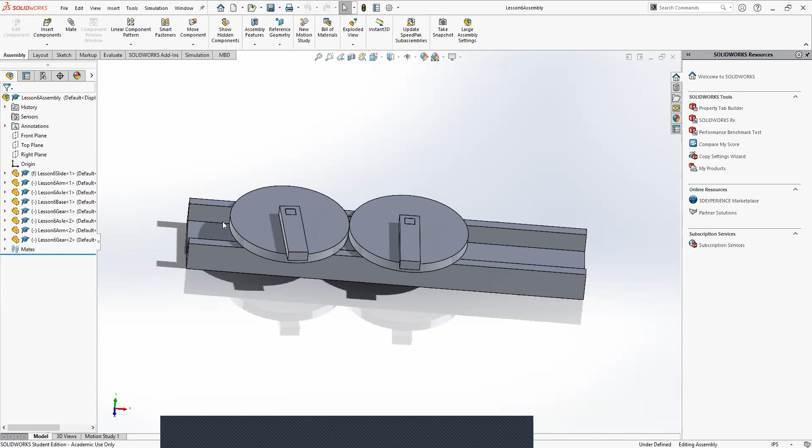So we haven't fully defined this. We did that on purpose though, because there's a couple fancier mates I kind of want to show you guys how to use.

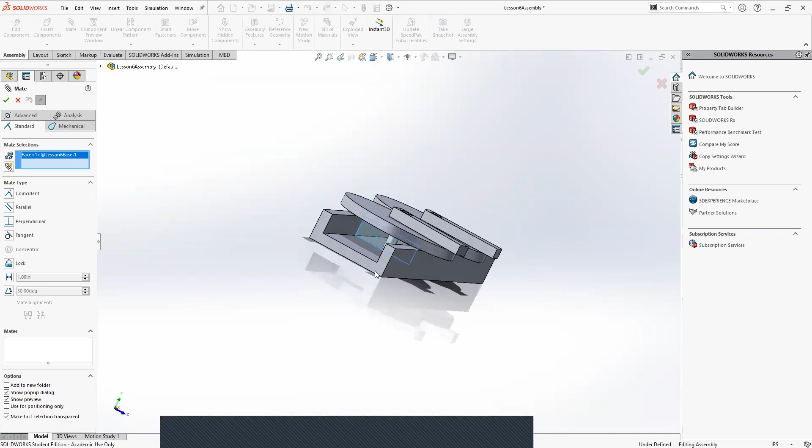So we're gonna go up to the little mate icon. For the first one, let's do this: select the base of one of the gears. No, don't click the actual gear, click the rectangular base we had mounted it on. Then click the side face like I have, and the side face of our slide, and make those coincident for now. This is just going to be temporary to keep them from sliding side to side.

Let me know once you guys have done that, and then we can go to the next part. Okay, that's done. Cool. Now we're going to go back into mate. As you can see, there's 4 tabs, right? We've been in the standard tab this whole time. That's the one you use most of the time.

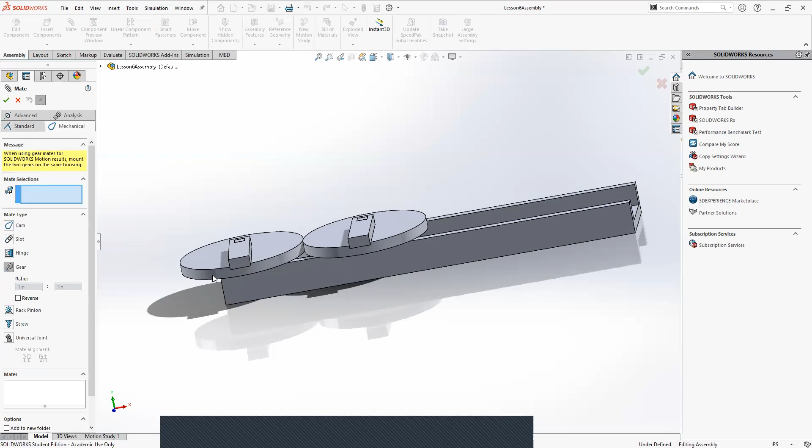We're going to click over to the mechanical tab now though. Once you're there, we're going to click on the gear icon. And then we'll click the circular faces, like the edges of our quote unquote gears. So once you click on those edges, you can click OK to make them mate.

And what that's basically done, that gear mate, it's made them work basically like gears. So as you can see, when you use the handle to twist one of them, the other one will also spin. This is a way you can basically use gears in assemblies.

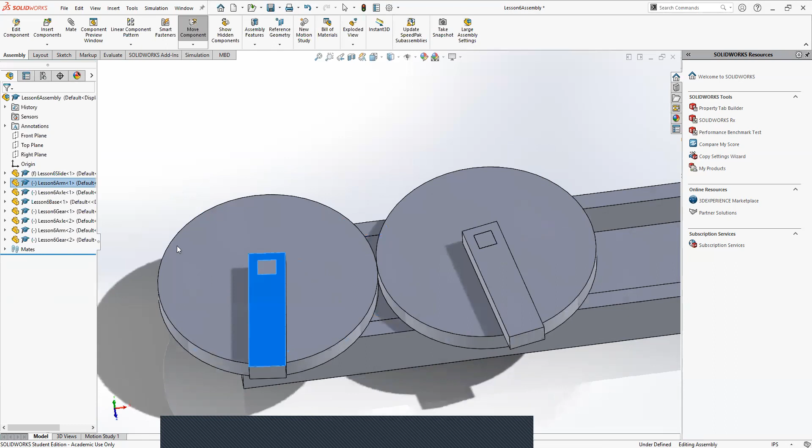And you can do this with actual gears as well. Like if you're either designing your own gear or downloading a gear, you can use the gear mate on actual gears as well. We're just using circles instead because it's easier to actually make that part. But yeah, when you guys are designing, if you ever need to design a little gearbox or some sort of power transmission system, something with gears, this will be a good tool to test.

Just a good way you can kind of put everything in an assembly, see how everything is going to spin.

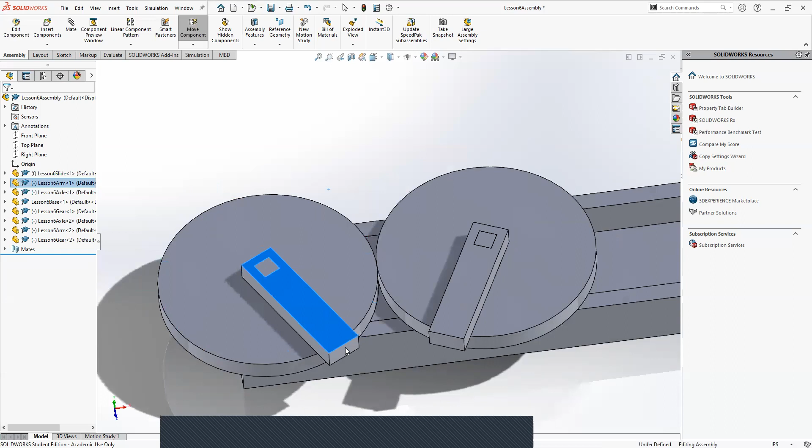And what's cool is it does work with gear ratios. So right now, since our quote unquote gears are the same size, you can see they rotate together at the same speed. However, if this gear was twice as big as this gear here, then the gear I'm driving would spin twice as fast. It does work with gear ratios, which is really useful. So you can get an idea of how fast stuff will spin.

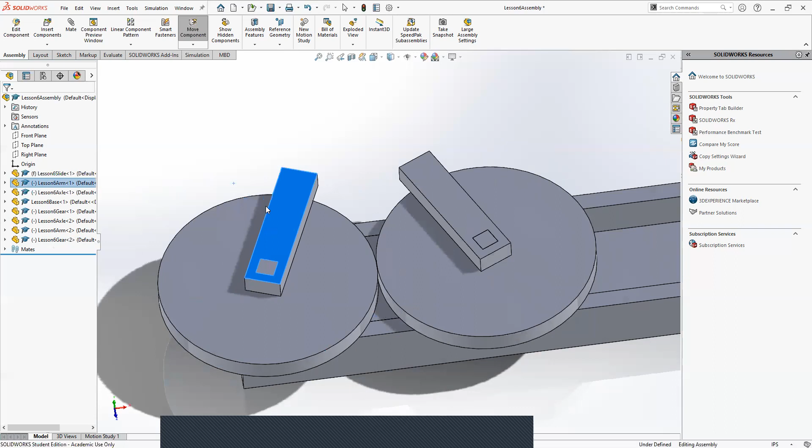So yeah, does that make sense? Were you guys able to get the gear mate to work? Must not have made it fully defined originally, since the arms aren't fully defined, because when I try to spin them, they're going through the design. Do you know what I mean, like up and down or side to side?

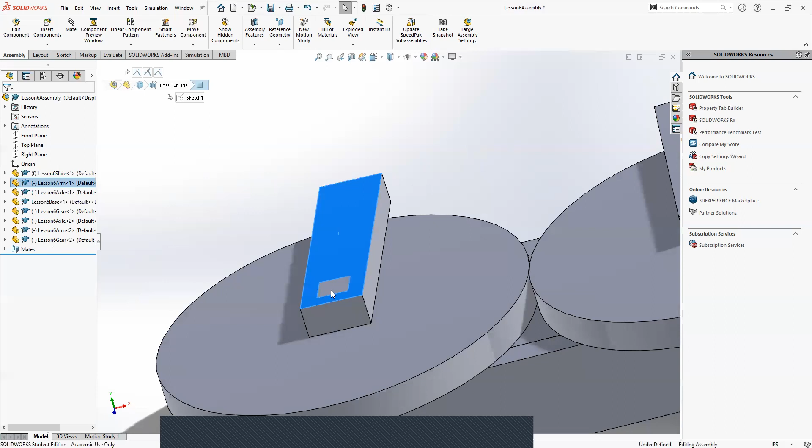Up and down. In that case, I would mate the top face to the top of our little peg here. That should stop them from going up and down. I would make them coincident, just to kind of lock them in place.

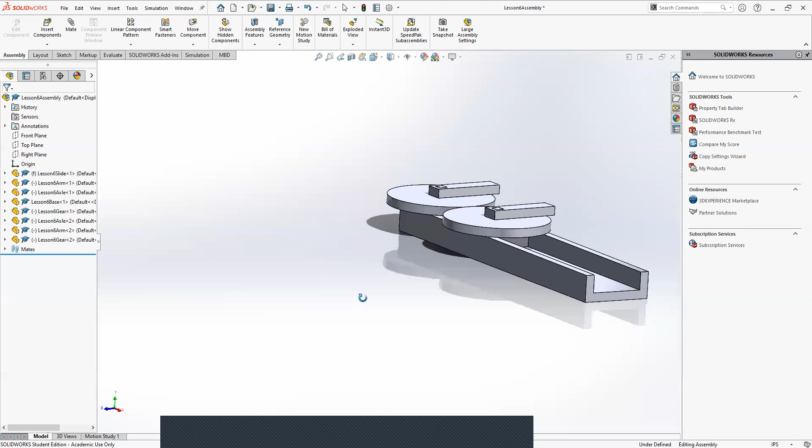It worked. It worked? Hmm. Cool. All right, so if you guys were both able to get the gear mate, this one's a cool one.

There are a couple other mechanical mates as well that I won't go over. To be honest, it's because I've never used them before. This is the only one I've ever actually had to use. But if you ever wanted to learn how to use one of them, you could always just look it up. There's really good documentation, I just have never needed to use it yet.

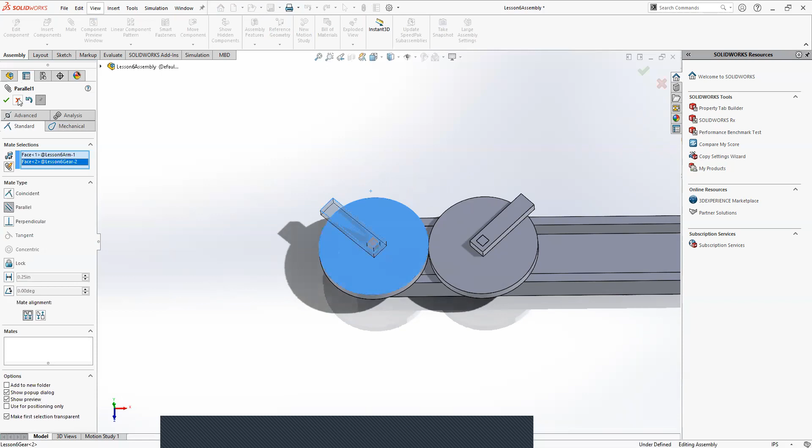If you guys are interested in learning it though, maybe next class I can do a bit of research beforehand and try to do something on it. But for now, we're going to try one other mate.

So in the last class, remember how we used an angle mate? If we go into the advanced tab under mate, we'll see there's a bunch of stuff. The two I find most useful are the bottom two. If you compare them to the standard options, they look very similar to our distance and angle mates. And that's because that's kind of what they are.

But instead of just mating it at a specific distance or angle, we're going to work with the limit angle mate. I'll show you how it works. I'm going to click the side of one of the gear's arms, then click the side of the slider, then click this limit angle mate. What it does is give me a maximum and a minimum angle. So instead of locking it to one angle, I can lock it between two different angles. Maybe I want it to rotate between, say, 90 degrees and 180 degrees.

Oh, hold on, that didn't go through right. 90 — oh, it's because this one needs to be the smaller one. That's why.

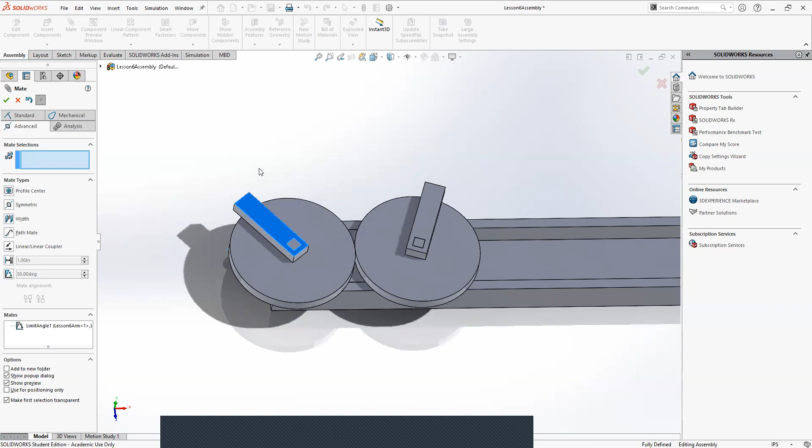Mine won't work. Mine won't rotate at all. No, I think I did it wrong. I think I know what I did wrong, but hold on — actually, give me a second. Let me try it again.

I know what happens if you go into editing the mate — sometimes if you put the same angle by accident for the maximum and minimum, it'll just keep it stuck at that angle. What happened to me was I tried putting the smaller angle in the top box and the bigger angle in the second box, and it gets angry at you. Make sure you have the smaller angle in the second box. So if you copy what I have on my screen, it should work.

Taylor, were you able to get it to work? Yeah. Okay, perfect.

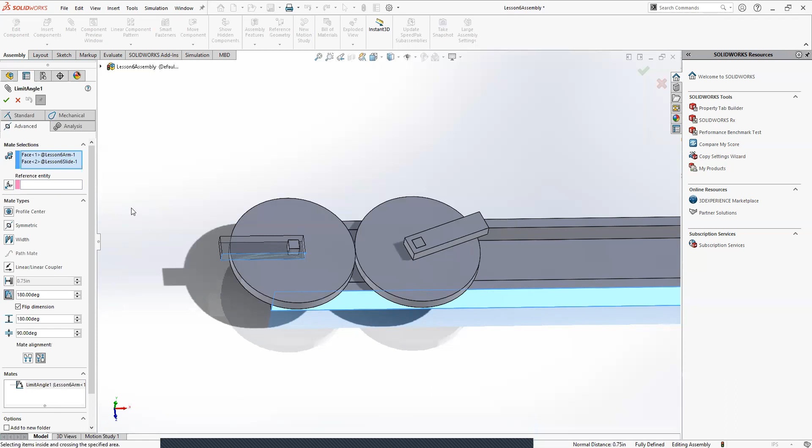Julia, were you able to figure out what's going on? I'm just trying to delete it right now because I know what I did wrong. You see the part where you click on the angle thing, like before you even do anything — yeah, and then it says 180 degrees. Yeah, I just clicked on that and realized I messed up, so I put enter, and it went to the same spot like your little leg thing did, and I thought that was fine, and then I checked it. Yeah, and then I messed it up.

Hold on, I'm going to try to delete it. This up here just tells you what angle it's at currently, and you can set that to whatever you want between your range. So I could set it to 100 degrees if I want. But these are the ones that set the bounds — this is just to display the current angle it's at, which is kind of useful.

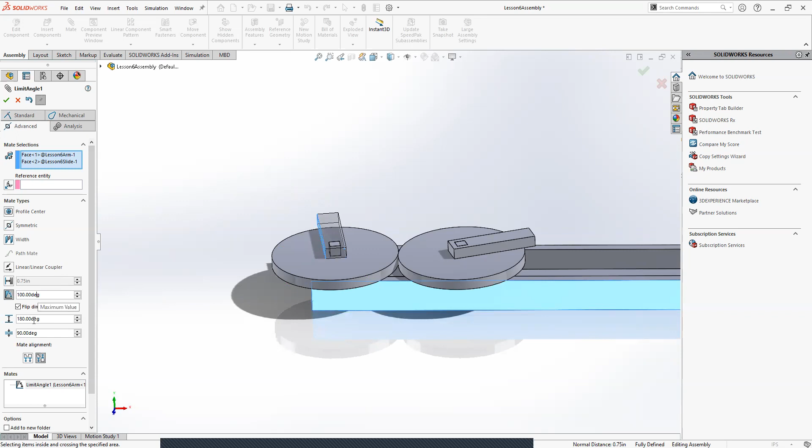All right, let me know when you finish that up, and then we'll do the next thing.

Taylor, if you're ready for the next thing, delete that coincident mate we had made between the side of our slider and the side of our base to keep it locked on one side. We're going to delete that.

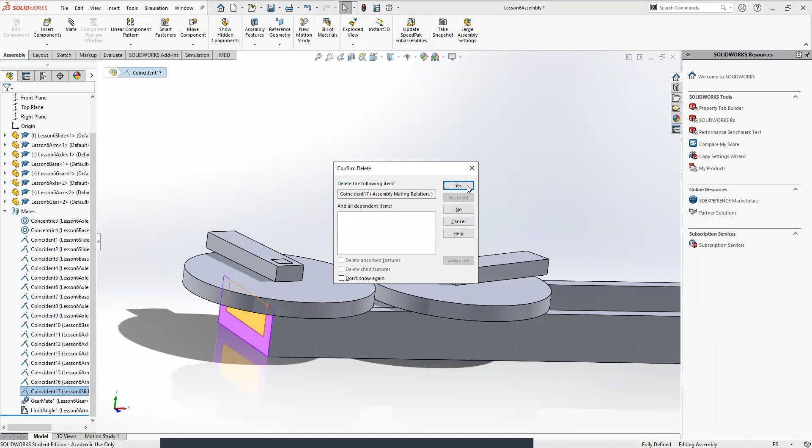Okay, wait, I got a question. I got it to move, I kind of did it. But you know how yours is sticking out on the side there? You're putting it where you are right now, like that, and that's where it starts, then it goes this way. It might have just been what faces you selected.

What you can do is try swapping your mate alignment. It could just be that you selected different faces than me, so since your angles have different reference points, they're going to look different. That makes sense, you know?

Yeah, I think you're right, now that I'm looking at it. Which is totally fine, I just wanted to show you how to use that mate, so if yours looks a little different from mine, that's okay. I'm not too worried about this working like an actual mechanism, it's more about you guys seeing how the different mates work and what you can do with them. So if it looks different, that's totally fine, I wouldn't stress about it.

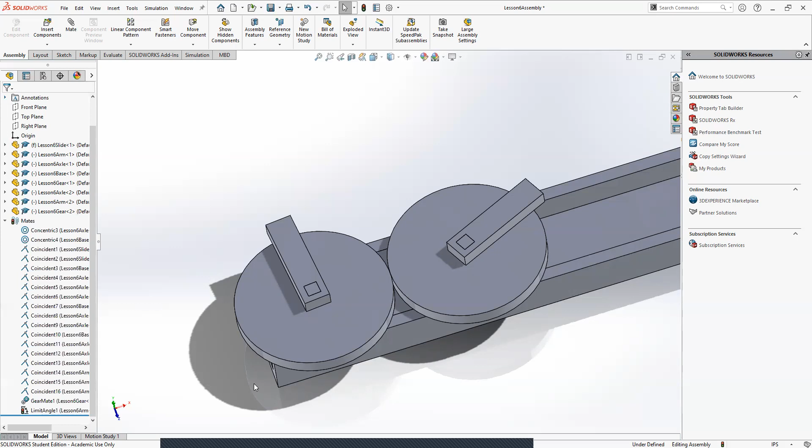You're able to get it to work though, like kind of rotate 90 degrees. Perfect, okay. So in that case, just delete that coincident mate we made near the beginning of the class, the one between the base and the side of the slider that we used to lock it on one side. Once you guys are both done with that, just let me know.

I'm done with that. Okay, cool.

And Julia, what are we doing? My bad, you remember the coincident mate we made right at the beginning to keep our base from moving around? We made it the side of our base. Yeah, okay, hold on, yeah.

Let me get rid of that, the side of the base to the side of the slider. Just click on that mate and hit delete.

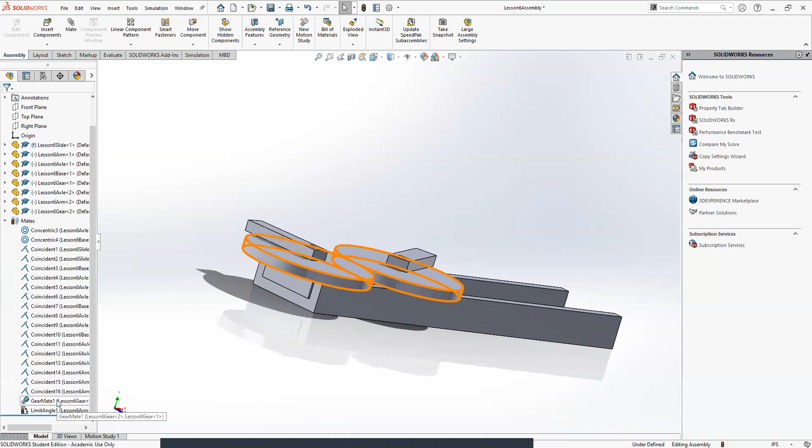You can go into the mate drop down. It should be the one right above your gear mate, because it was the one you did right before then. Okay, because I was confused on which one it was gonna be. You could always click on it to make sure, and it'll highlight the faces it's mating, so you can make sure it's the right one that way.

Okay, I deleted it. Cool. All right, because we're gonna replace it with a cooler one.

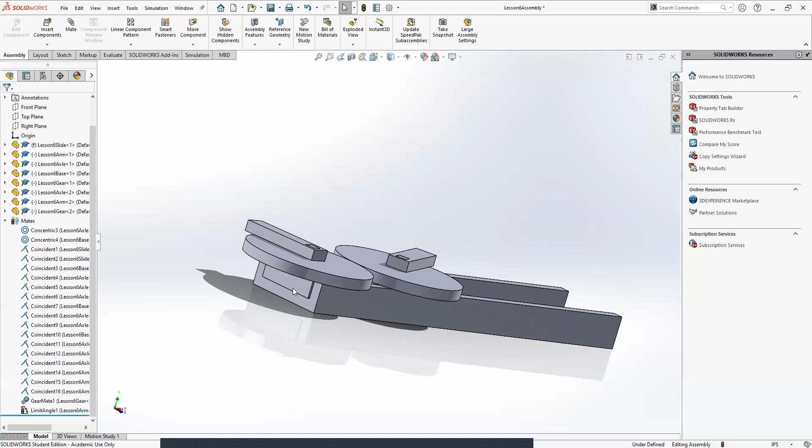So we're gonna go into mate again, go into the advanced tab again, and click on the distance one this time. It works basically the same way the angle one did. First we need to select our faces. I'm going to select the faces of the coincident mate we just deleted, so the side of the base, side of the slider. What this one does is work very similar to how the angle one did, where it'll allow it to move between a maximum and minimum value.

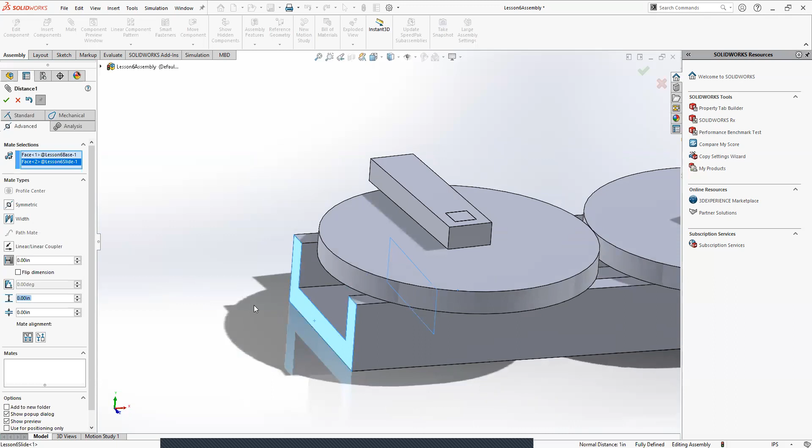What I'd like us to do is set it up so that this little base can move inside of the slider, but can't move outside of it. Because right now, if we dragged it all the way to the side, it would just move outside the slider and keep going. I want it locked inside of it, if that makes sense.

So our minimum is obviously going to be 0, because we don't want it going further to the left than that. For our maximum though, I forget how long I made this slider. Let's try 10 and see how that looks.

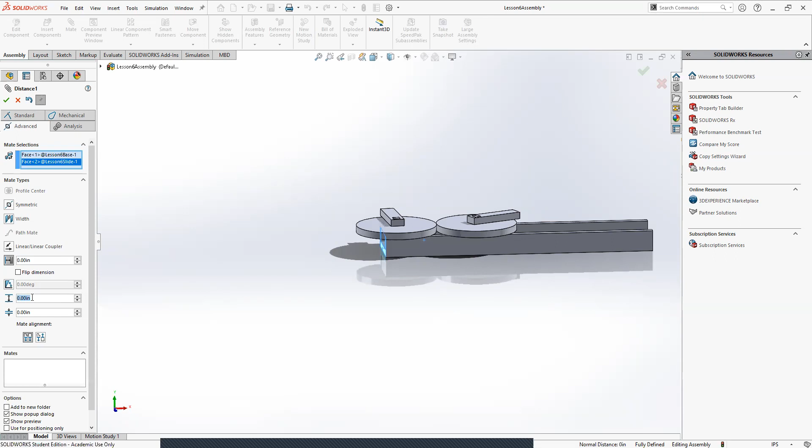My number keys aren't working. That's not working for me either. Okay, in that case, let's see.

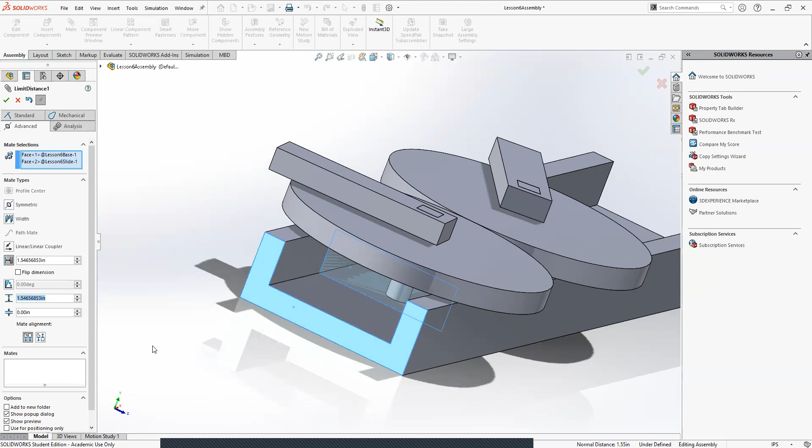I'm gonna select the two faces, go into advanced, click distance mate. We'll say the minimum is 0, and the maximum is 10. Oh, it worked for me that time.

All right, let's see what 10 looks like here. How does 10 look? 10 is too far, I'm gonna make it 7 instead. How does 7 look? Nope, too far. 6.

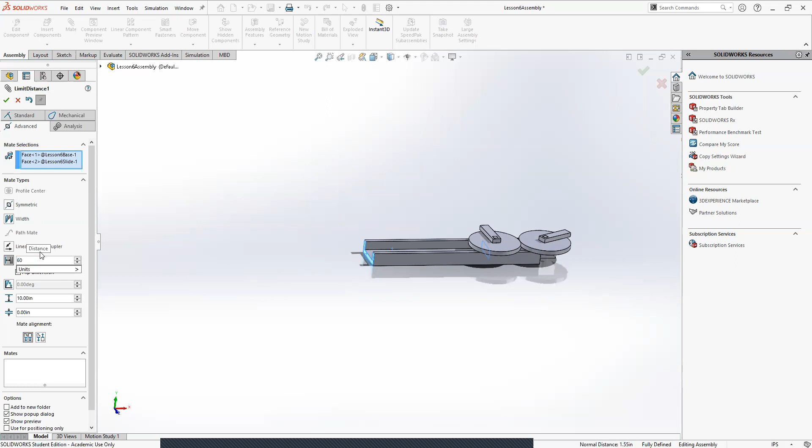6 is right. Oh, nope, 6 is not right, hold on. Oh man, did I mess up one of my mates? Oh no, I didn't, it's just transparent. Okay, so I think we want to set our maximum to 6 inches and our minimum to 0 inches.

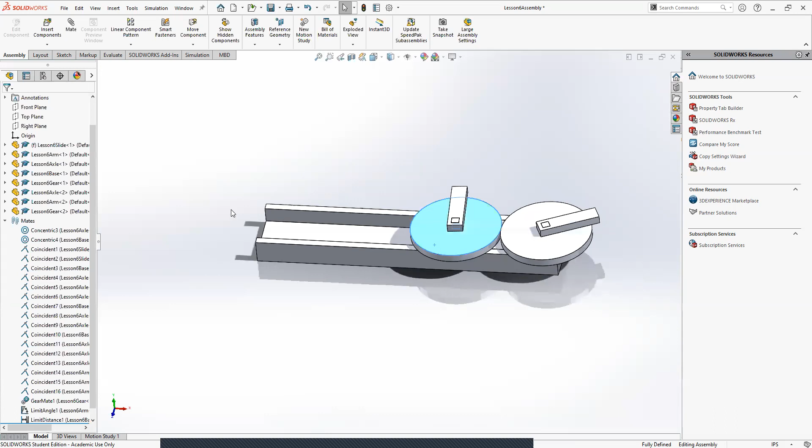Now it should be able to only move inside the slider.

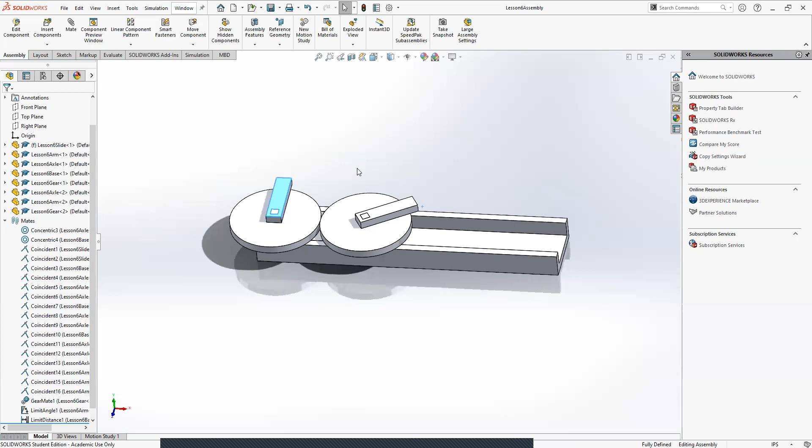I was able to get that. You were able to get that? Awesome, it worked the second time, even though it looked like I did the same thing. I don't know, I bet whatever. I guess it worked. Yeah, for some reason it wasn't letting me enter numbers into the box the first time I did it. I'm not sure why.

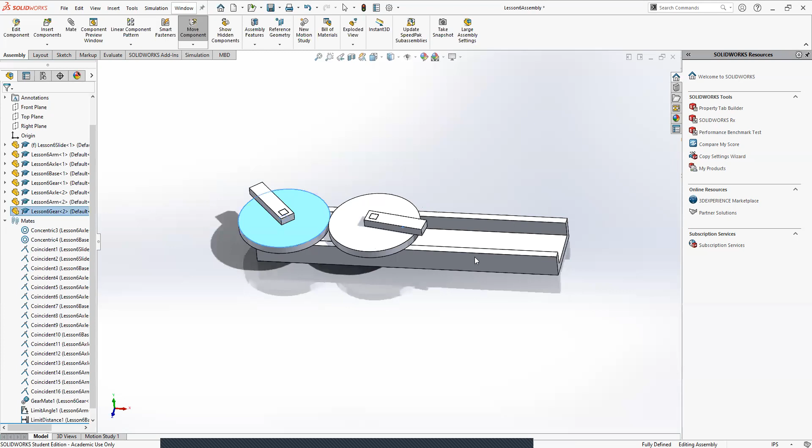Do we do it with the other side now? You don't need to, because if you properly set it up, what's happening is when it gets to the other side, this side is hitting that max distance. Oh my bad, wait, what was the max distance? The minimum distance is 0, the max distance should be 6.

Oh yeah, because I put 10, that's why. Okay, go lower. I originally put 10 as well, but that was too far. Yeah, all right, hold on. Normally what you'd want to do is take some measurements and do a little bit of math first to see how far it can travel.

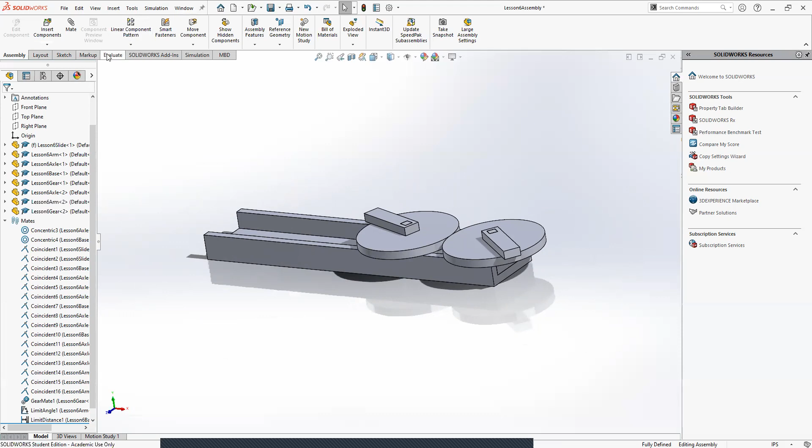I forgot the measurements though. I guess I could have used the evaluate tool. You go into evaluate, into measure, and you can measure the distance of things. So I could have gone here. Oh hold on, I clicked that side line. Come on, select the line.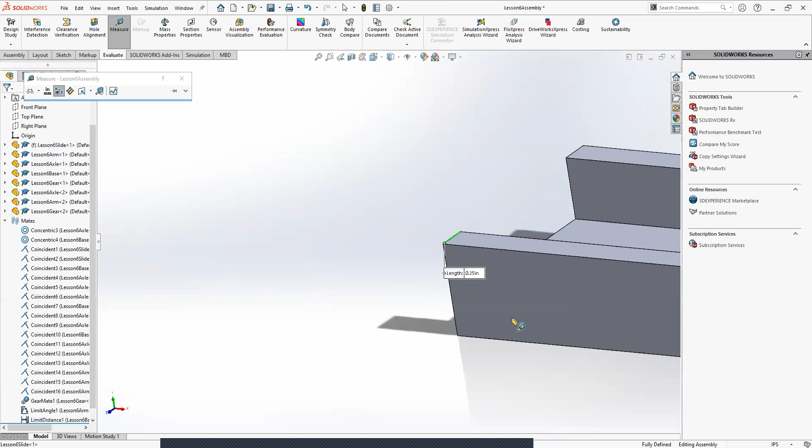Okay now I'm good. I'm just kind of curious, so let's see the length of my slider.

Let's try something. Have I shown you guys how to use the measure tool before? I don't think so. Okay.

Cool, in that case let's go over to the evaluate tab, and then we'll click on the measure tool. It looks like a little tape measure, and it lets us calculate the distance between things we select. So if we select one side of our slider, and then the other side, it'll give us the distance between the two. We can see it's 10 inches long, our slider.

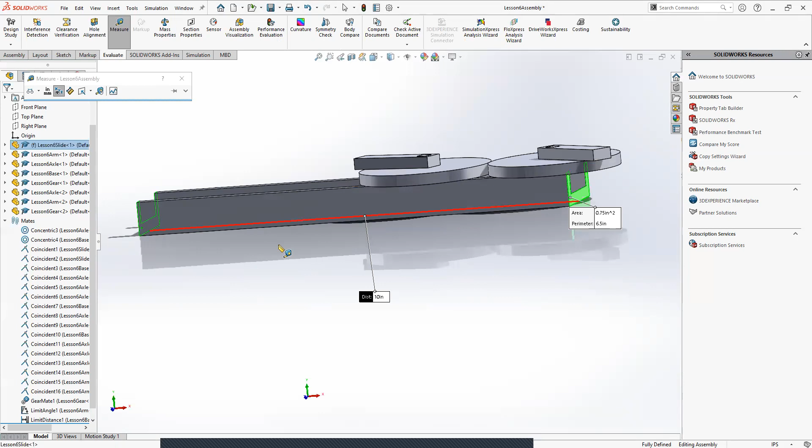By clicking on those two sides, it gives me the distance between them, which is 10 inches. And if you click off into the distance, it'll clear your selections. So now if we select the two sides of our two bases, that side and that side, we see that distance is 4. So if we do the length of the slider minus the length of our bases, which is 4, we see that the distance between the side of this base and the side of the slider here should be 6 inches at the max.

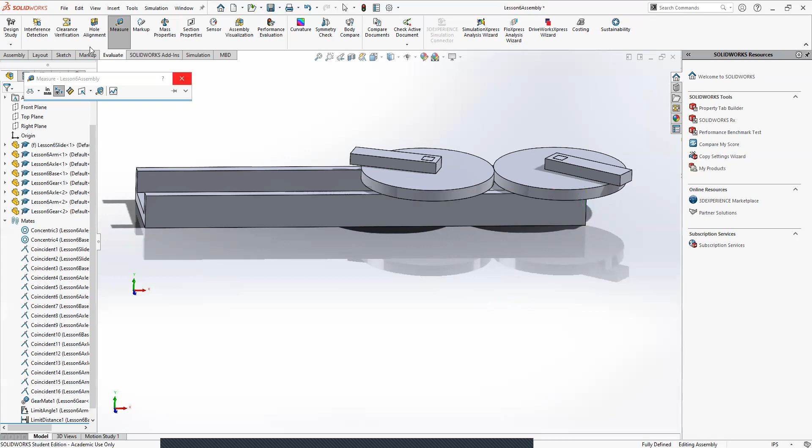So you can do a little bit of math in measuring to figure it out instead of trial and error, which probably would have been the better way of doing it. But yeah, the measure tool is super useful, I use it all the time.

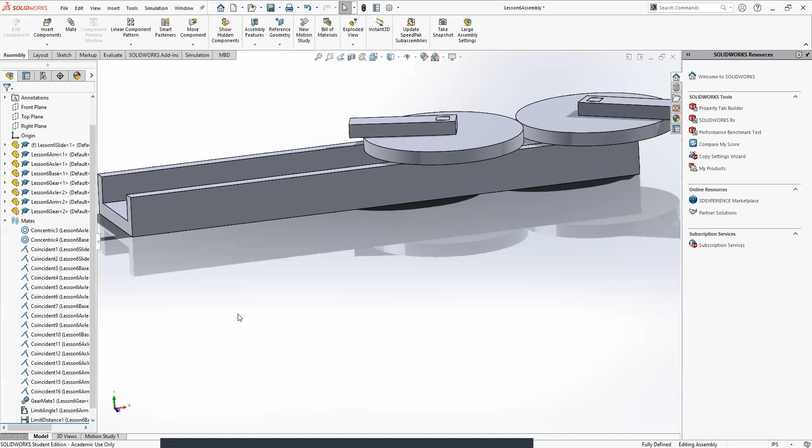That way you don't have to go back into the parts in the drawings to figure out the distance, you can just tape measure them and see how big it is. It's especially useful if someone sends you parts or something, that way you can do a quick measure without having to sort through all their sketches, because sometimes it can be tricky to go through someone else's parts depending on how they make them. So using the evaluate tool, you don't have to really mess with any sketches, it's really nice.

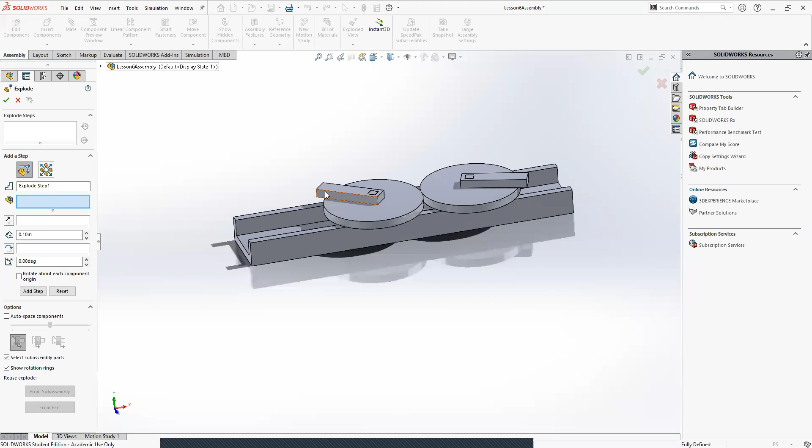So once you have the explode menu open, whenever you're doing an exploded view, you want to take it apart. Think of how you personally would take it apart. Looking at this, I'd say first I'd take the arm off because that's kind of holding on our gear, then I'd take the gears off, then I'd take the pins out of the bases, then I'd take the bases out of the slide. So think through the order you'd want to take it apart, what you think would be the best way to do it. So we're going to start with the arms.

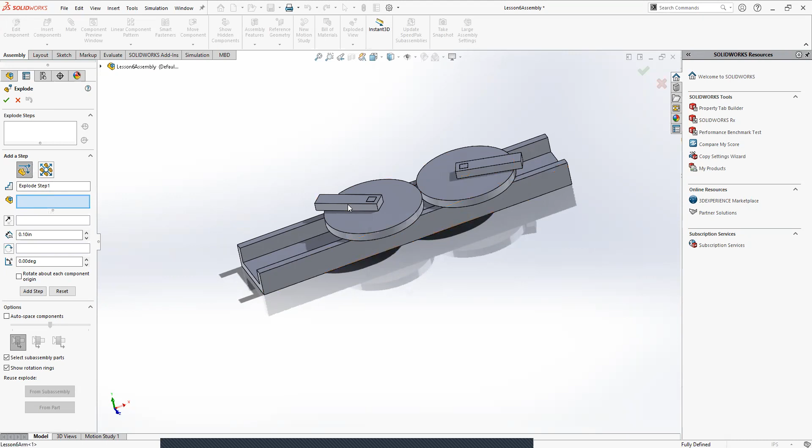It already has our explode step components selected. So we just need to click on our first arm, and I'm going to do both arms together.

Now you see it gives us these arrows that we could drag them around on. I want to bring mine directly upwards, not off to the side, because we're thinking about how we'd want to disassemble this, and obviously there's a pin there, so we're not going to drag it to the side.

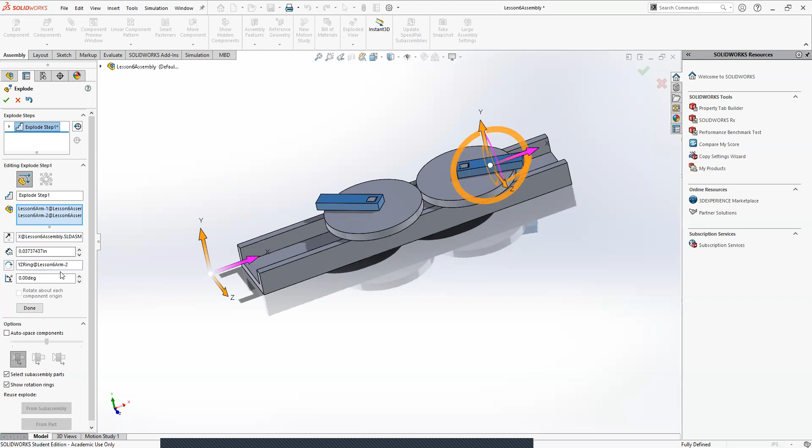So I'm going to drag it straight up. When you're doing your first ones, you want to make sure you're leaving enough room to bring the rest of your parts up. So I'm going to bring them up a decent distance, about that far.

The other thing is you could also put in the distance yourself. If you know you need this to be exactly 4 inches high, in this little distance box you could type in 4 and it'll move them up exactly 4 inches, which is nice if you want all your parts spaced in a certain way. I usually just drag it by eye because I've never had to do anything like that, but it's something you can do.

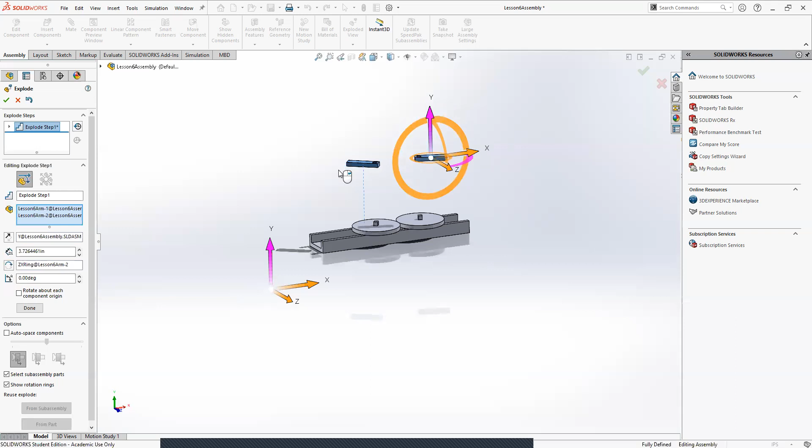Once you have the arms dragged up to where you want them, I know most of the times when we're done with something, we hit the check mark. We don't want to do that here because we haven't finished our explode view yet. If we click it, it'll just close our explode view and say, there's your exploded view, and we'll just have our arms up there, and that's not what we want.

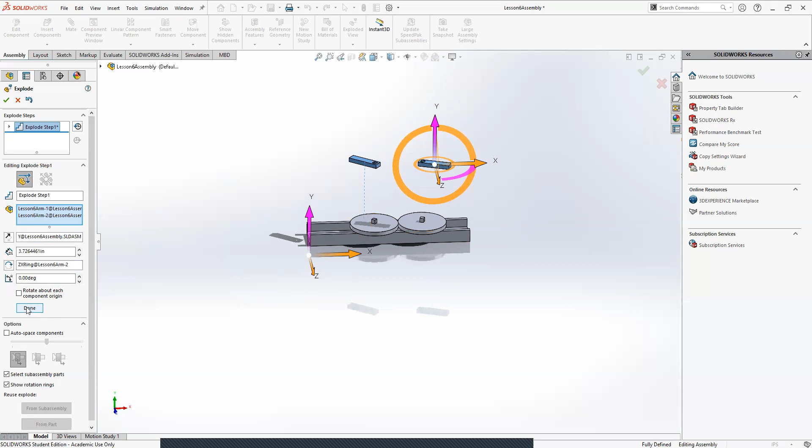So after each step, you have to click this little done button down here. I'm going to click done, and now you see it saves the step we just did. Now we get to move on to the next one.

So I'm going to start with my gears. I'm going to select both my gears, and I'm going to bring them up, making sure to leave enough room for what comes next.

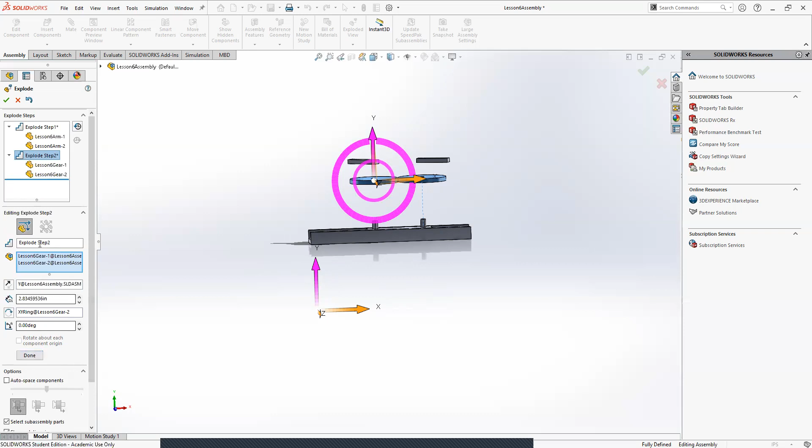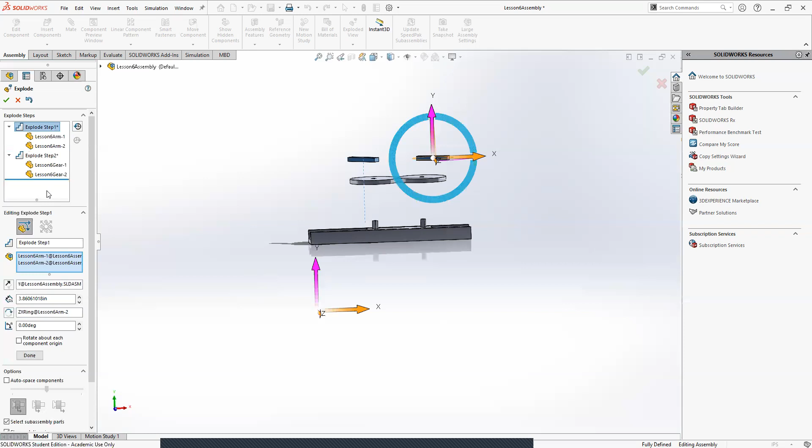And that's basically the steps you follow. Now let's say you messed up on a step somehow. You can, in the explode steps, click on it and actually edit it. So maybe you go back and realize you didn't move the arms up high enough, you can just click on that step and move them up. So you can go back and edit them.

I'm going to click done, and you see it brings me right back to explode step 3. So I'm going to kind of finish off this exploded view. Let me know if you guys have any questions. But yeah, now I'm just going to bring the pegs up.

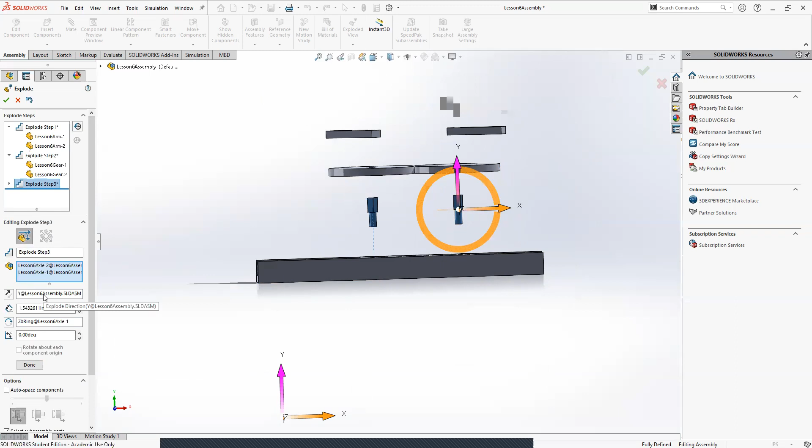When you click the check, will it do something, or will it just stay there? Once you finish it, we'll see. Good question. Oh, selected the wrong thing. There we go.

And you can see I don't really like how mine are spaced, so I'm actually just going to go back into my other steps and edit them, because I feel like mine's a little too cramped right now. They make it really easy to edit this stuff though, which is super nice.

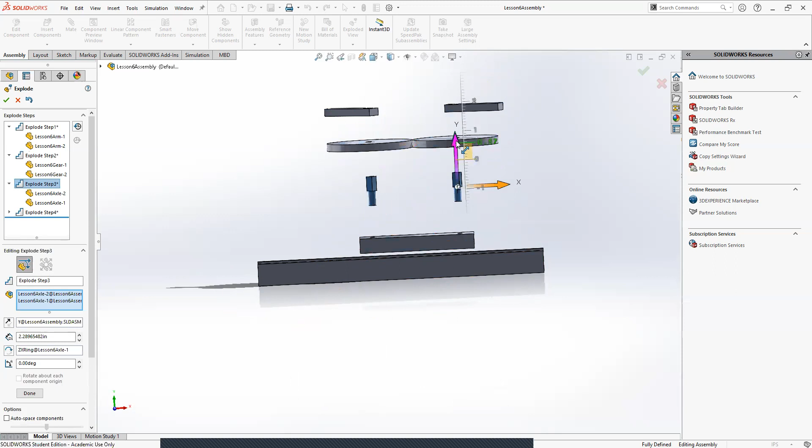And if you ever accidentally go and click the check mark, I'll show you guys later on how we can get back to the exploded view we made and all that. So let me know once you guys are all done with all your exploded steps, and then we can click the check mark. There we go.

I'm done. You're done? All right, cool. Yep, cool, I'm also done. Perfect. All right, so let's hit check.

And yeah, it stays like that. So now you might be wondering how we can put it back together, I guess, right?

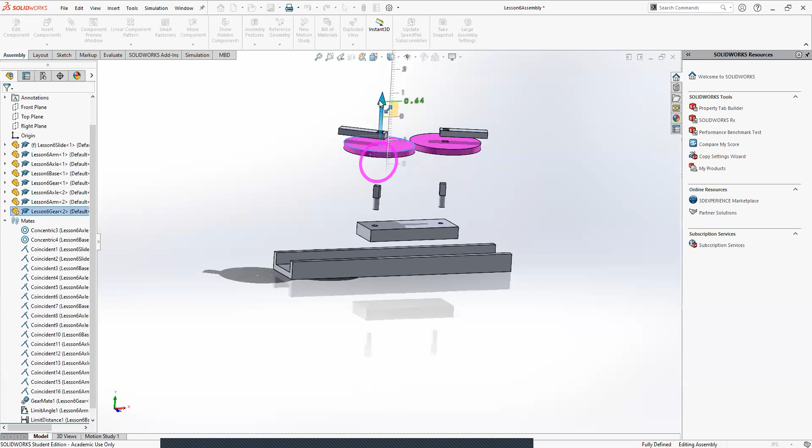Oh, that's interesting. So here, I'll show you how we can access that exploded view we just made. This whole time we've been working with SolidWorks, we've kind of just been sticking with this thing called our feature manager up here, but there's a couple other tabs we can go to. We're going to click on configuration manager.

And then we see a little drop down we can click here. Now exploded one, that's the one I had made before that I was using. But you can see we have this view called exploded view. Mine's exploded view 2, yours will be exploded view 1. You can see it has all the steps we just made, and this is where that exploded view is.

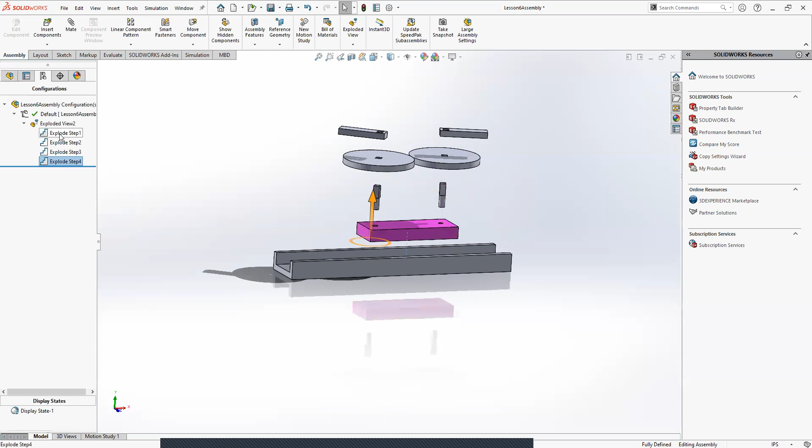So if you ever click check too soon, you can always just right click on it, hit edit feature, and get back into it and make your changes or add new steps maybe.

And if we ever want to put it back together, we can right click on the exploded view and click collapse. Click on it again, explode. And there's also animation options, so you can animate the collapse and everything will kind of put itself back together, which is kind of fun to watch.

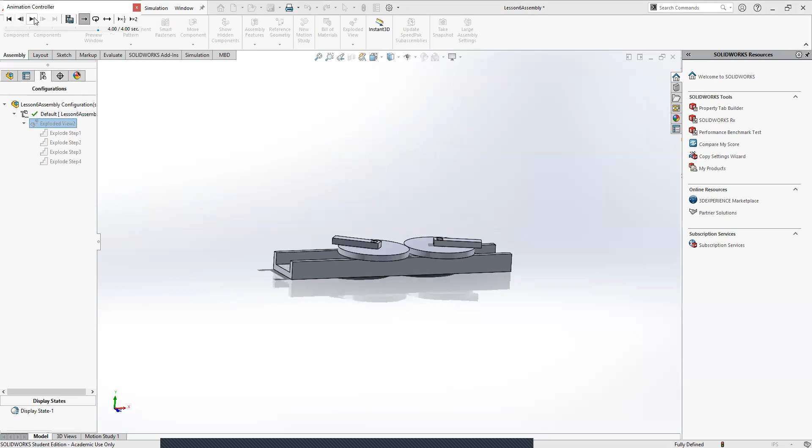And you'll see we have a little video bar up here. So if you want, you can actually loop it and hit play. And you can kind of see it'll just keep doing it.

You could also set it to reciprocate, which basically means it'll put itself together, take itself apart, and almost do the steps in reverse order each time, which is fun.

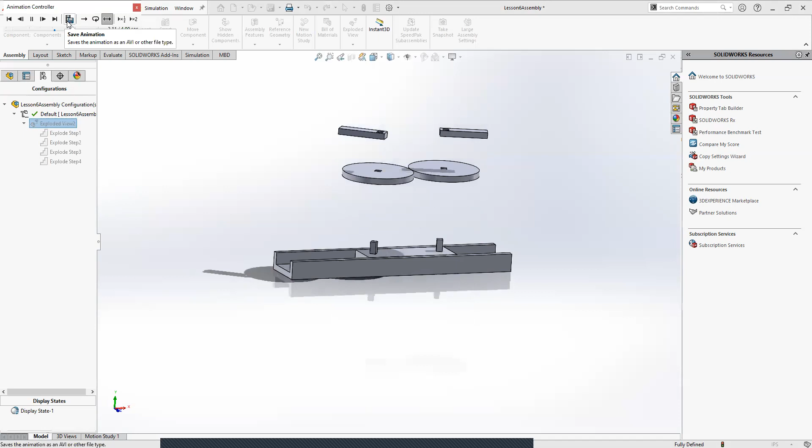You could also save the animation if you want. So maybe someone's like, hey, I want a little video of how everything kind of comes apart, gets put back together. You can save an animation of your exploded view if you want, which can be useful sometimes.

So I'm going to close out of that. Now we can kind of toggle if we want it exploded or collapsed. Similarly, if we explode it, we can do this thing called smart explode lines.

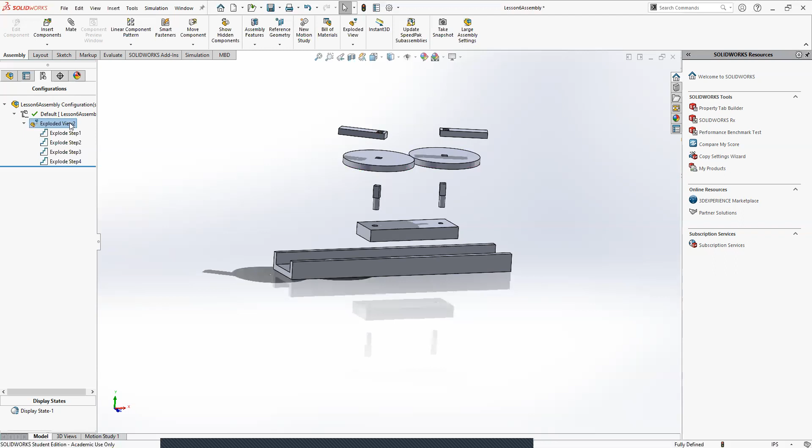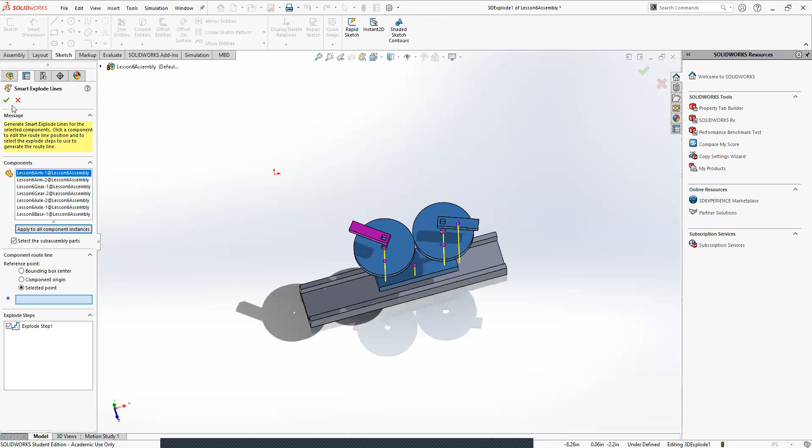These aren't super useful. They're kind of nice just to show the direction everything goes, I guess. But I'll admit, I don't really use them a ton. They can be useful if you're assembling a bunch of circular objects onto a shaft or something like that, but other than that, I can't say I use them much. I'm sure they're useful, I might just not know how to use them properly.

So maybe if you wanted to ask John or something, he might know a bit more about that. But yeah, so that's exploded views. So we can kind of collapse that.

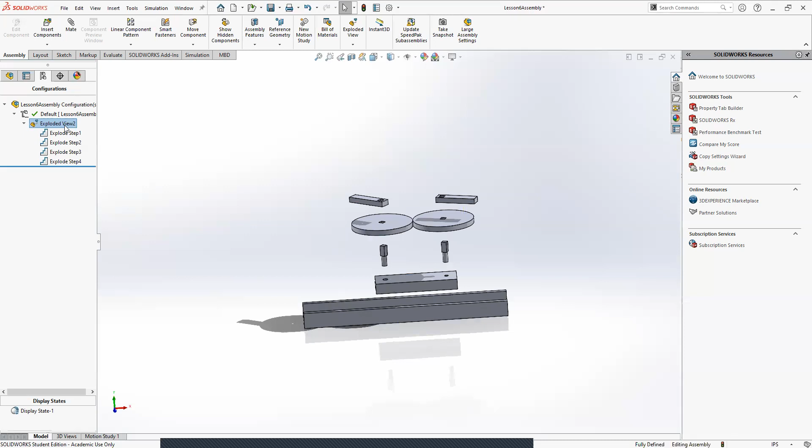And I'll be, oh wait, did I want to? Yeah, I don't think we're going to get into that.

I guess I might as well.

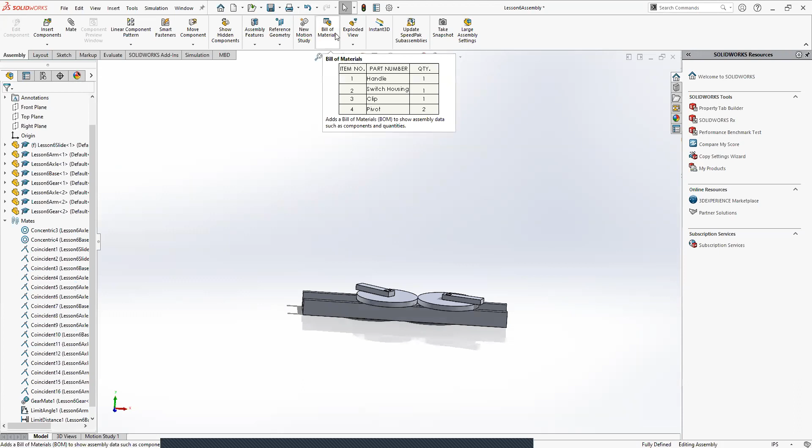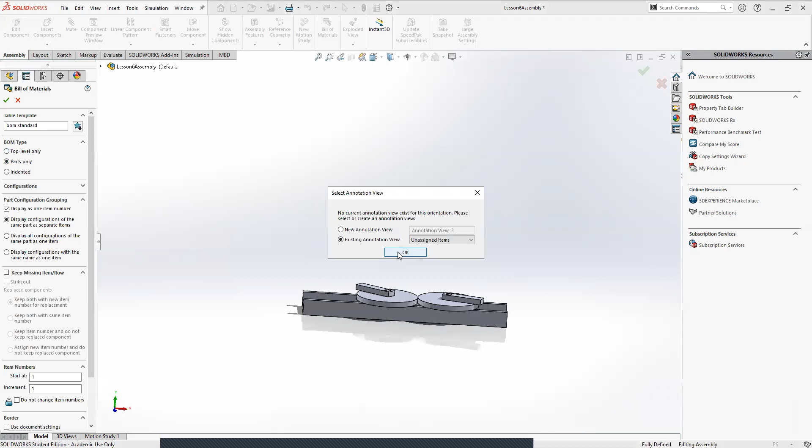One thing you could also insert into your assemblies is a bill of materials. It's in the assembly section. I don't use this a lot, but if you click bill of materials, I'll click parts only because I want it to just display the parts I'm using. Using existing annotation view, it'll basically chuck a little bill of materials onto our assembly, giving me all my file names and how many of each I use, which is kind of useful.

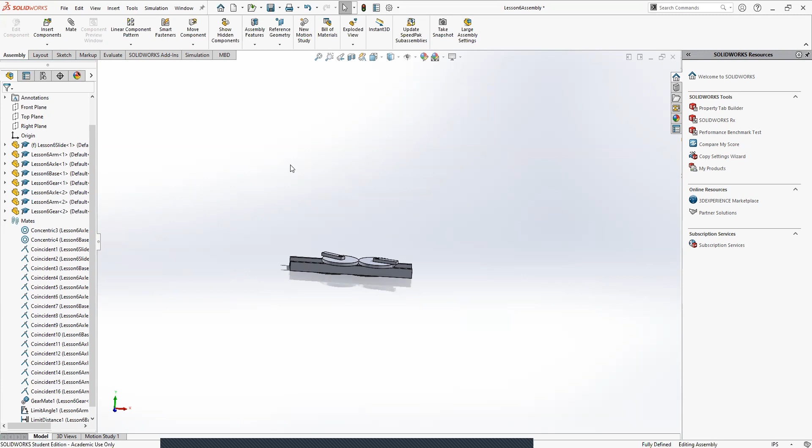You won't really see these much in assemblies though. I've never really used this in an assembly, but bills of materials are really useful, and we'll see it later on when I talk to you guys about drawings, because bills of materials are very important in drawings. I don't really use them much in assemblies.

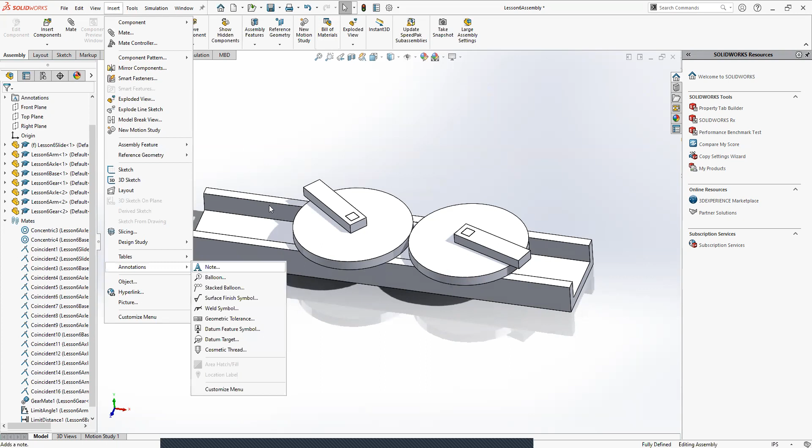Just to show you one other quick thing, if you go to insert annotations note, this can be useful whenever you're making a part or even an assembly. If you ever want to annotate things in your part, you can do that. See how I can have this little text box? If it's on an object, it'll do a little arrow pointer, and you can type words in it if you want.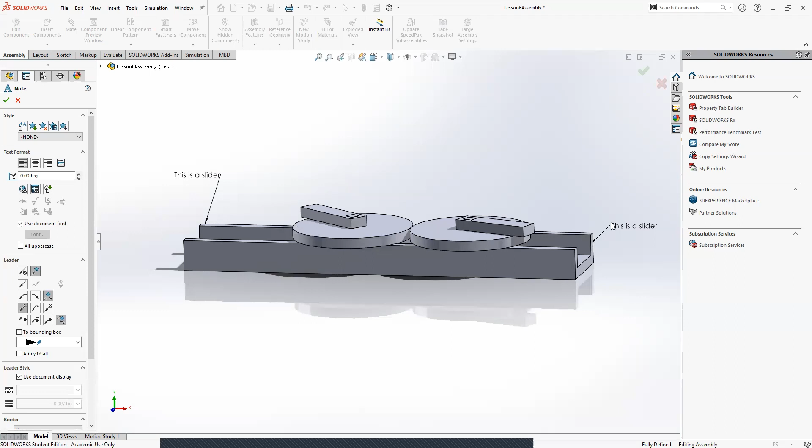So you could say 'this is a slider,' and then click out of it. It'll give you the option to duplicate more, so maybe I want to put one over here too. I don't know, you could also just use it to— actually I'll just delete these, I don't really want them there. I'll keep the other one.

You could also use it to just put your name in there if you want. This is kind of useful—I remember when I took my SolidWorks class in college, whenever we made a part, we had to put our name, the class we were taking, and the homework number we were working on with it. These are kind of useful, and you can use them in parts as well.

So annotations are kind of cool, but not super useful. What else is there?

One last thing I wanted to show you guys before we finish up. Would you mind opening a part? Actually, let's do this—on the feature tree, let's click on one of the arms. If you click on it, you'll see there's an option to open the part right up here, which is useful—you can just open the parts from the assembly. So I'm going to open up the part.

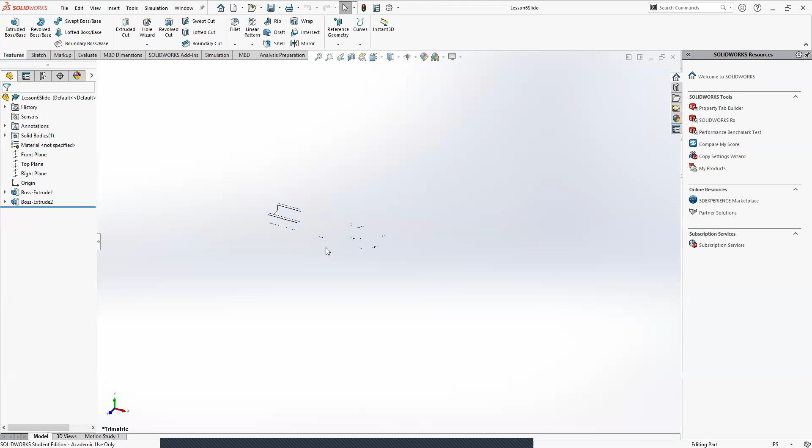Does not seem to be working. I'm going to try that again. Try opening up—it doesn't have to be the arm, open up whatever part you want. Okay, that's not working. All right, well I'm going to have to open mine normally because for some reason it's not showing up properly, but just open up any part you have on your computer. I think it's just a SolidWorks issue for me. Whatever, I'll still show you guys how to do this. It's just going to be kind of weird on my screen because it's not working, but let me know when you two have a part open.

I'm good. Me too. All right, so last thing—let's see, if we click on our part, down on this tree here there's this thing called appearances, scenes, and decals.

Wait, hold on, how—okay, do you click on the whole thing? Because I keep trying to do that and I keep failing somehow. I just highlighted it. Oh my bad. That makes a lot of sense—you could also click on the boss extrude feature if you want, but I'm a fan of highlighting. Then you see this little tree on the right side with all these little icons.

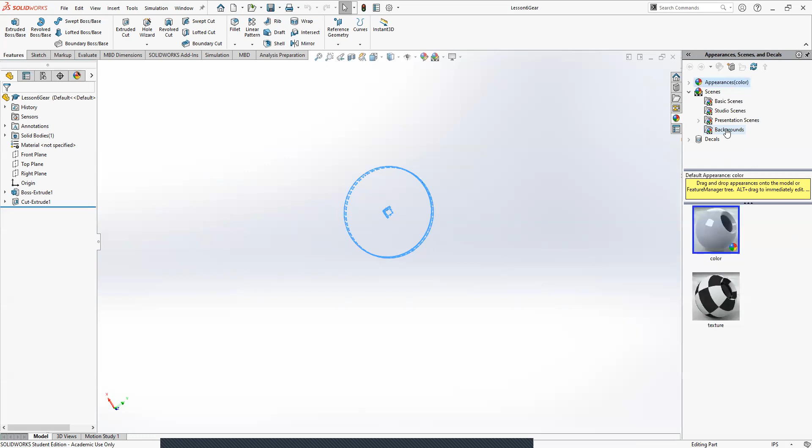If you click on the multicolored ball, this one's kind of fun to play around in. So one thing you can do is give decals. Another thing you can do is if you open up scenes, you can give it backgrounds, like just give your part a background, like a forest if you want.

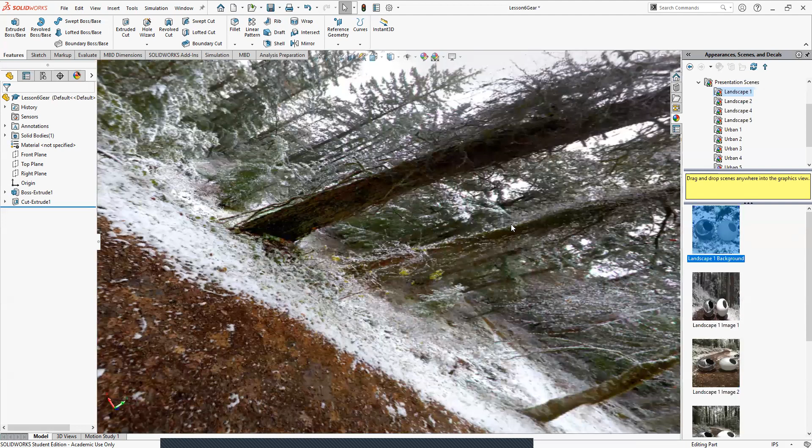Which I don't know, I don't really mess with the scenes very much.

But one thing that can be useful is if you go to appearances, color, and do the drop down for appearances and color, you can choose a material for your part to be made out of. This is mainly just for looks, but it can be kind of useful. Like if you're making an assembly and maybe one part is going to be made out of white Lexan, another part aluminum, another part black plastic extrusion, you can make it match that color so it's a little more obvious for people when they look at your assembly. So it's not just a bunch of gray parts.

So if I go to plastic, maybe I select like a medium gloss, and you can see it has all these different colors for us. I'm going to go with, well actually this is a gear, quote unquote gear, so I'm not going to make it out of plastic. I'm going to make it out of metal. I'm going to say it's a steel gear, and then I can pick what type of steel I want it to be. We'll just say it's like a brush steel.

I think you have to add appearance to the part. Yeah, and that should work. That doesn't show up on mine because for some reason SolidWorks doesn't seem to be working for me. But were you guys able to set the material appearance for your part?

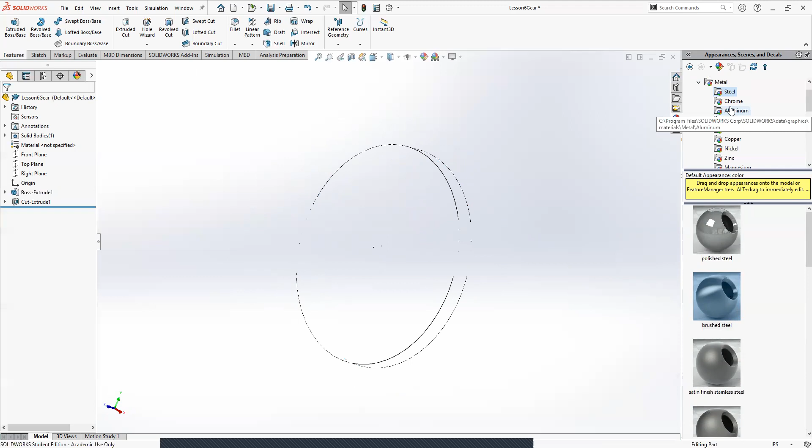I didn't even know that there was a material option, but I will do that. Yeah, if you go over to appearances and do the drop down for appearances and color, you'll see it brings up a whole list of materials. And if you just keep going through the drop downs, you can see all these different materials.

And then I'd pick steel, and from there you have a bunch of different types of steel. I think if you double click it, it should just apply it to the part. Let me know if that works for you guys. It's not a super important feature, but it's kind of fun to mess around with, and like I said, if you're making an assembly with like 20 parts, it can really help them stand out.

Is it like, okay, you know how you click the glass and the picture looks all beautiful, like it looks like glass? It doesn't look that good on your part though, does it? No, it just looks clear. Yep, it never looks that good on your part. Okay, well that's unfortunate. It is, right? Yeah, I mean it's probably partly because of the geometry.

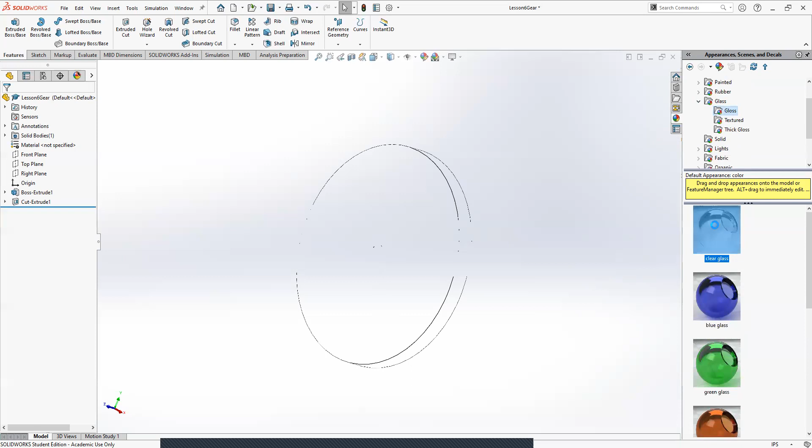I think the round spheres look really cool with the glass. Yeah, for some reason it's not loading for me. Oh wait, glass worked for me. That's cool. But yeah, no, I know what you're saying, it just looks clear and boring. Yeah, even the different materials, they don't look different, they just look like different colors. Yeah, pretty much.

I like the stone ones, the stone ones are kind of cool. Which one's the, oh, brick. You can make them look like they're out of brick. I love messing around with brick. It didn't even let me make it look like a brick, it just gave me one color for the brick. Oh really? Yes. Oh, that stinks. Yeah.

Yeah, I gotta get a new computer. I'll be honest, they don't look as good as they advertise.

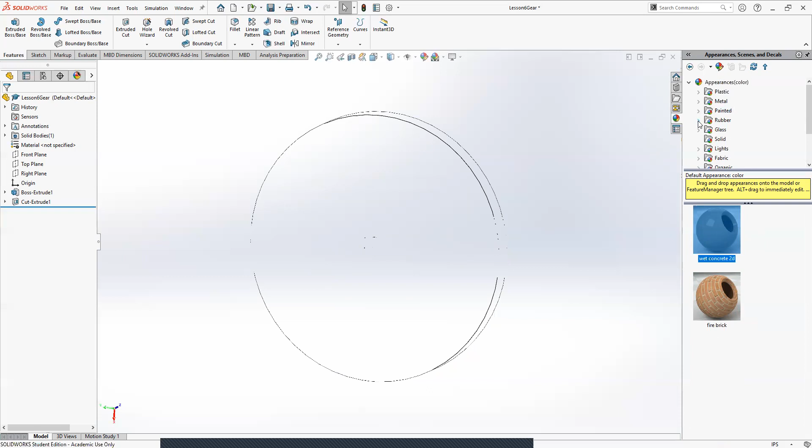Like I said, it's mainly useful if you know, hey, this part's gonna be made out of black plastic or something. It can help to differentiate that color. Or you can make it different colors if you're making something out of a bunch of different little plastic pieces, just different colors so it pops. It's a nice way of giving a bit of intent.

Like when I was working over the summer, I had to design something with a little lens piece in it. I made the lens piece out of glass, which was cool because in the assembly I could actually still see through the part, which is what we wanted. So it can be kind of useful sometimes.

While we're here, the other thing I wanted to show you with evaluate is you can also go into the mass properties thing, and that'll give you a bunch of info about your part. It can give you your volume. Since we didn't set a real material, the density and stuff won't be correct. But if you ever want the volume of your part, surface area, center of mass, or anything like that, it can give you a ton of data, which is super useful.

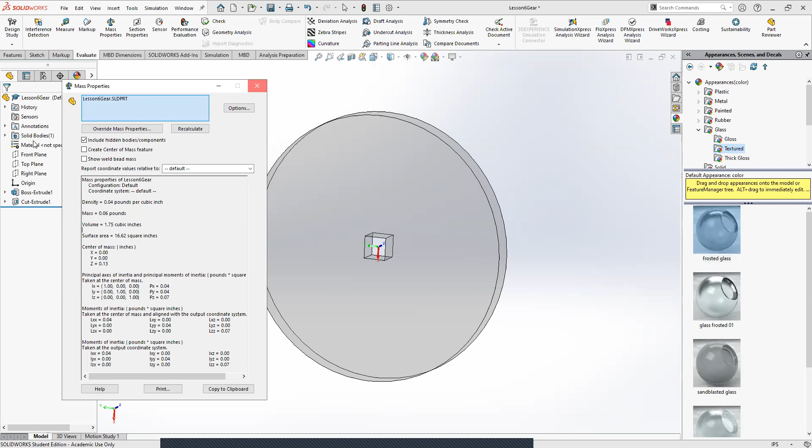I think you have to... I don't know, do you guys want to learn a little more about mass properties? We still have a bunch of time. I don't know if you want to do one more quick thing. I don't care, unless Taylor cares. I don't care either. Cool.

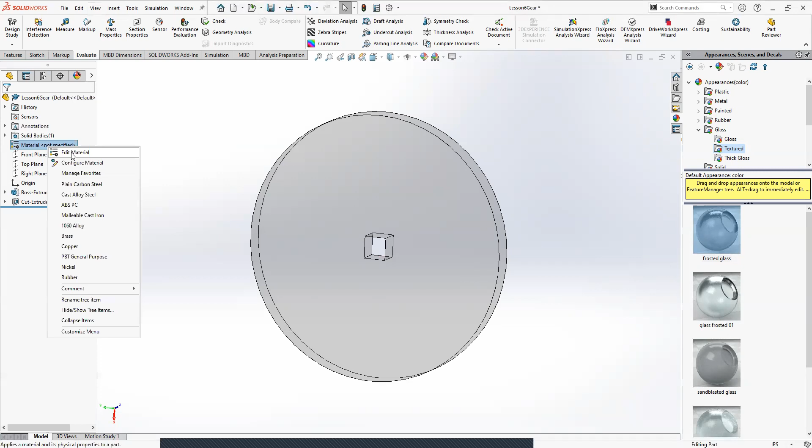On the left side there's this little thing called material, and right now it says not specified for us, because like I was saying, this is just cosmetic. But let's say we really did want to make a glass gear for some reason. Let's right click on material, it says not specified, and we'll go to edit material. Configure material would be if you want to input your own. It gives us a bunch of different materials we could work with. Does it give us an option for glass? Doesn't look like it, maybe glass fibers.

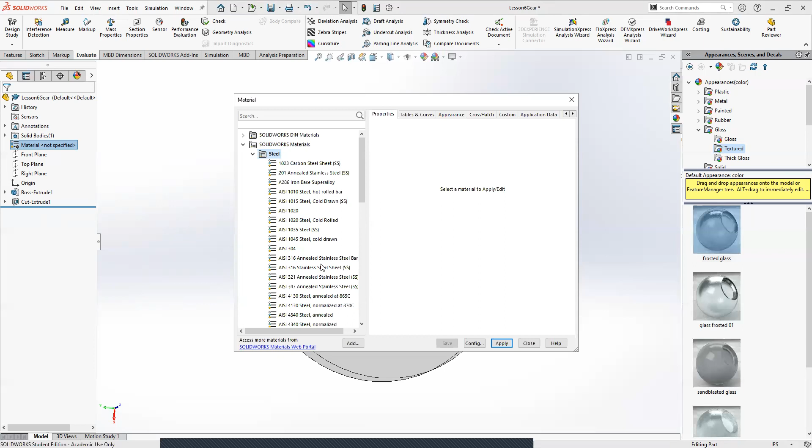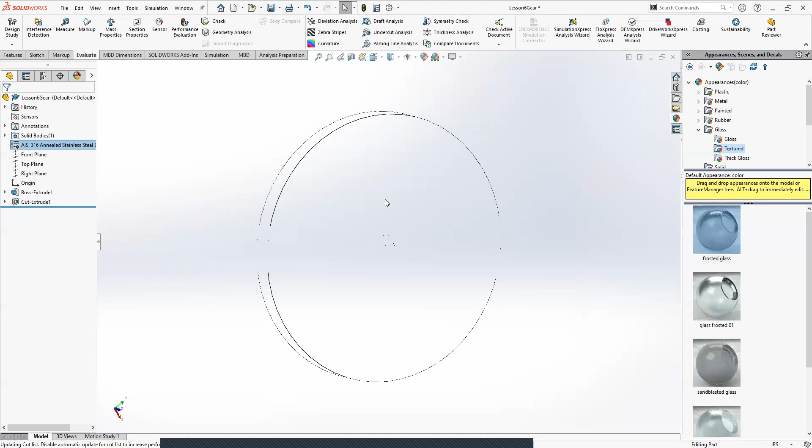That's not really glass, so let's just do steel. There's a bunch of different types of steel we can work with. I'm gonna do AISI 316 annealed stainless steel. And if you click apply, I think it changes the appearance automatically to whatever material you set. I could be wrong. Oh my god, it has a texture - this is the only one that's ever had a texture. Glad you found a cool one.

It'll override whatever appearances we set over here, because these are just cosmetic. But once you set that, and you click mass properties, now it'll use the density of that material and automatically calculate your mass, your volume, your surface area. It gives you all these other numbers you've probably never seen before, but they're useful when you're doing engineering math on parts. So using materials and the mass properties thing is super nice.

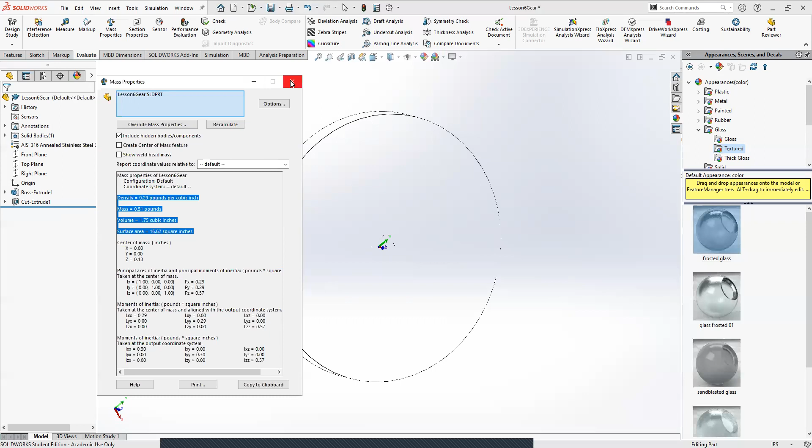Like when we're designing the robot, we're really worried about the weight of parts. This is a great way of, before you even make a part, if you know what material you're making it out of, you can see how heavy it is. Then maybe you think, okay, maybe we could swap to this material, and see how heavy it is. Using these materials is also useful for other stuff we won't get into in these lessons since it's a little complicated. But mass properties and the materials feature can be really useful, especially if we're trying to save on weight.